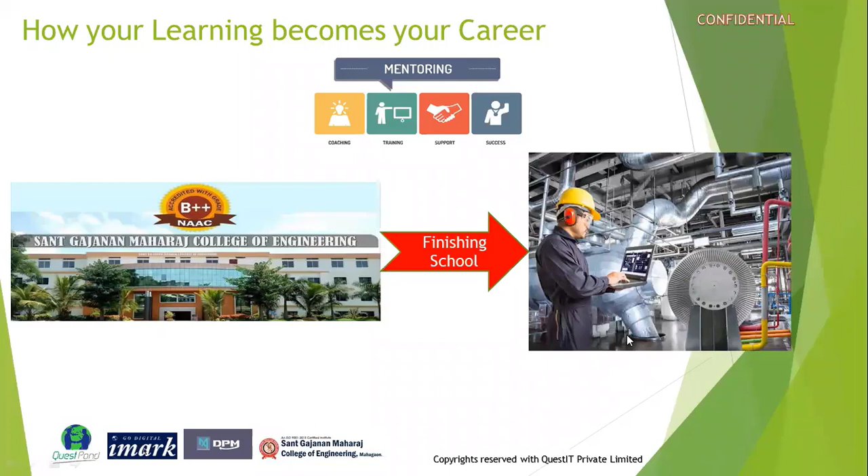As we always mention, our role is a role of a mentor to prepare students industry ready. So this is the 7th session. As I mentioned, there is a message. Before we start the session, I would like to cascade this message to everybody.

Let's look at this. There are 4 industrial revolutions that have taken place. Back in the 17th century, end of the 17th century, that was the first time when motors started coming. That was the pre-industry period. So the first time there was some activity where machines started converting to human advantage.

The machines were used to roll the wheels. That was the time when the concept of automobile started.

In 1870, again end of the 19th century, mass production started. Industries started building up, large industries started building up. That was the time when there was a movement across the world. Paper mills started, steel plants started. Whichever raw materials or minerals were freely available in nature, depending on those, a lot of industries started, and jute mills started coming up. So that was late 1800s. There was a big change that time.

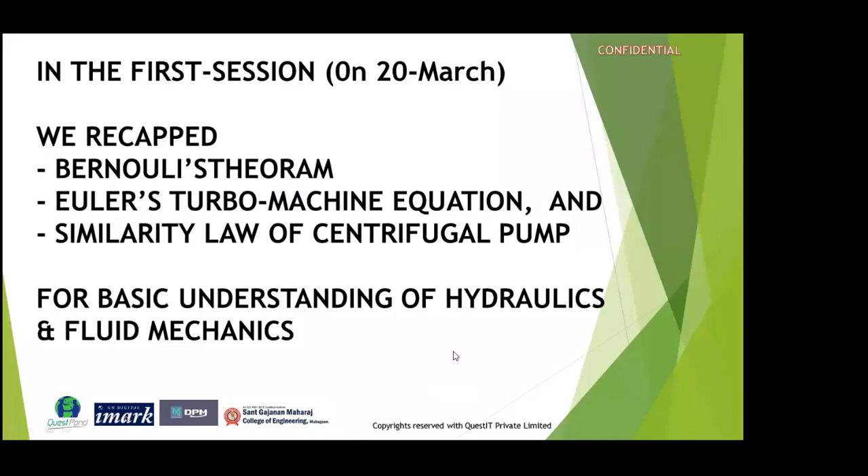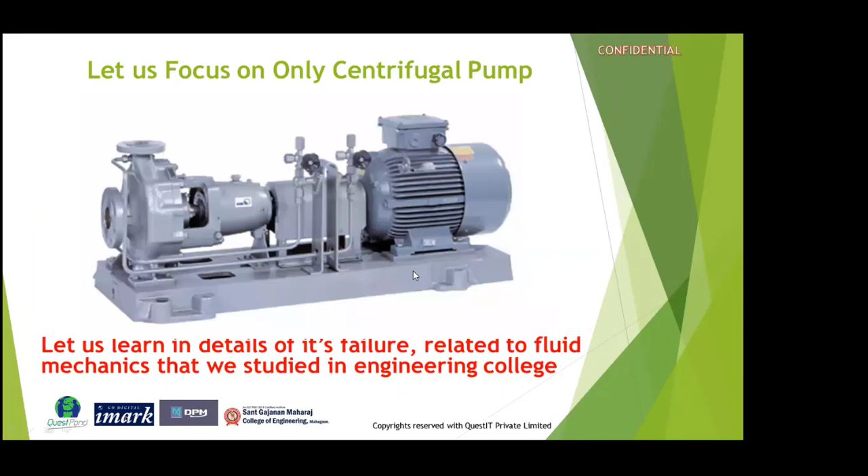So we have done certain clarification on the hydraulics, applied on centrifugal pump. These are the things we had gone through of centrifugal pump, the affinity laws. We focused on centrifugal pump, and talked about the graphical representation of its performance.

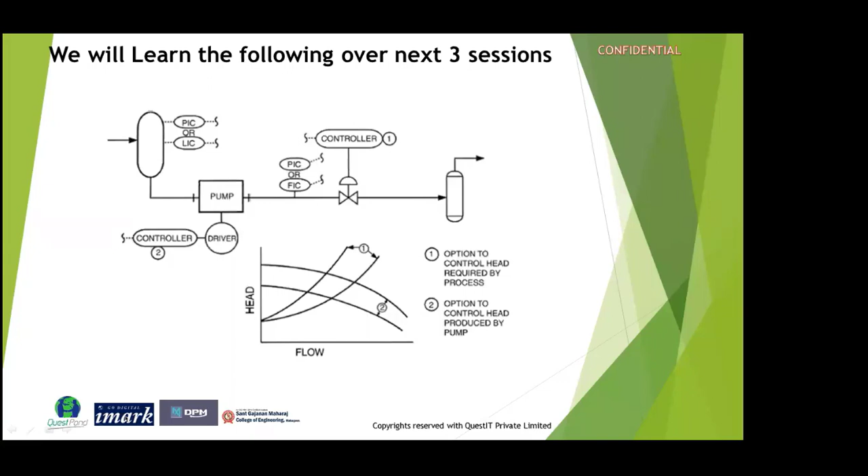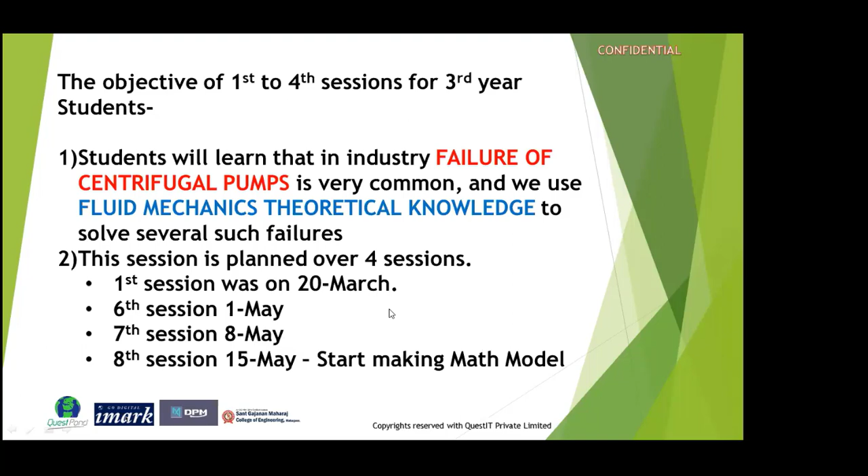Now let us look at where we are. We are on 7th session. Today I'm just giving some idea about the concept. Starting from next session, we'll start making the mathematical model, and then how it will be developed in the next sessions. The 9th and 10th session, these are very tentative - the mathematical model of centrifugal pump will hopefully be ready.

This will be done by you guys, and the one who had done the best, we will take that and move forward. Then what we will do is introduce you to another machine, a little more complicated machine, screw compressor. So far we were doing centrifugal pump, we will switch over from centrifugal pump to screw compressor. We want to expose you to a somewhat complicated machine, and then we'll show you how this model can be applied for this machine as well.

So then we will develop this model for screw compressor, and use this model and introduce it to the software of screw compressor. In the next 2 sessions, we will apply your model of screw compressor to the software. Then you will start doing hands-on on the software, working on it and doing experiments to understand what is the role, what is the meaning of this mathematical model, what is the meaning of all these theoretical things, why it is so important.

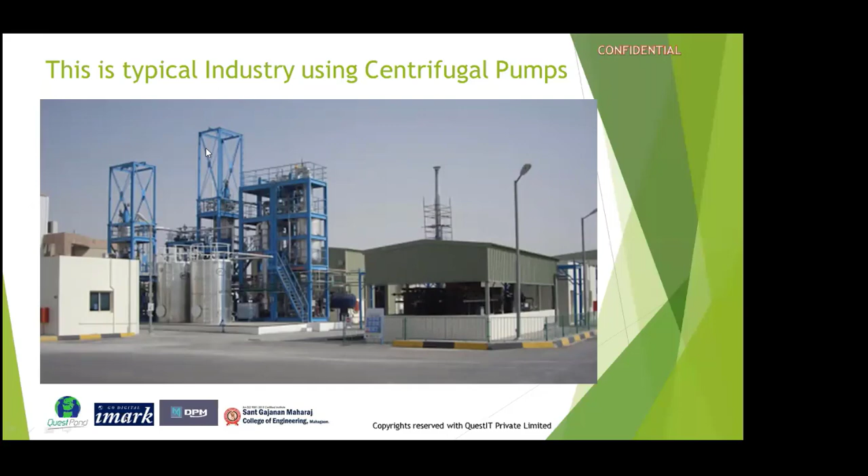Okay, so this is an industry where centrifugal pump is being used. We discussed all these internal components. These are the fluid dynamics you have done, and these are the curves we discussed that day, last session.

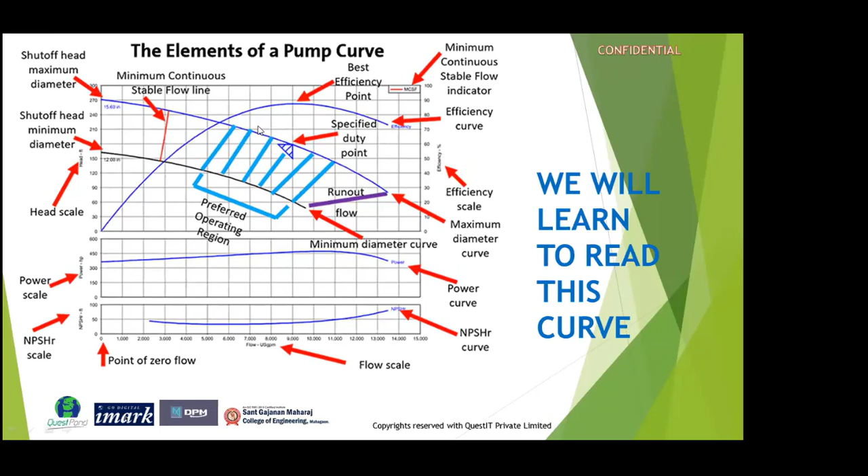We talked briefly about affinity law. So these are the different diameters of the impeller, and how, because of the affinity law, you do the calculation. There was a video also there.

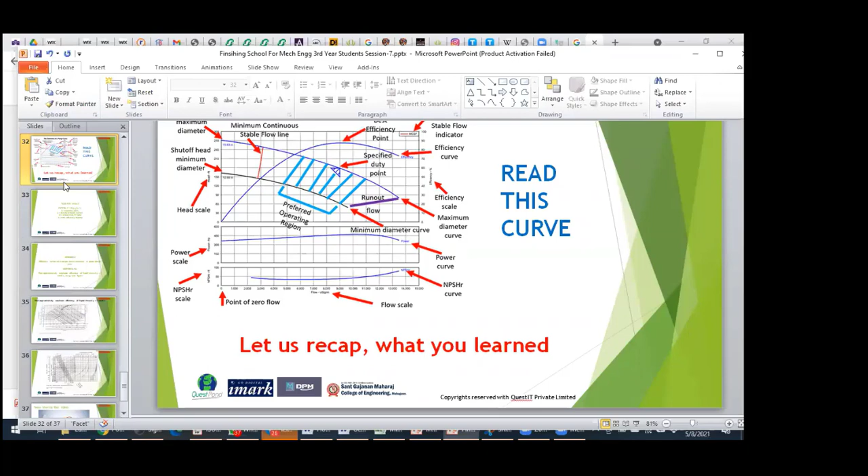Did you go through this video? Students, did you go through this video? Students, you can open your mic and talk.

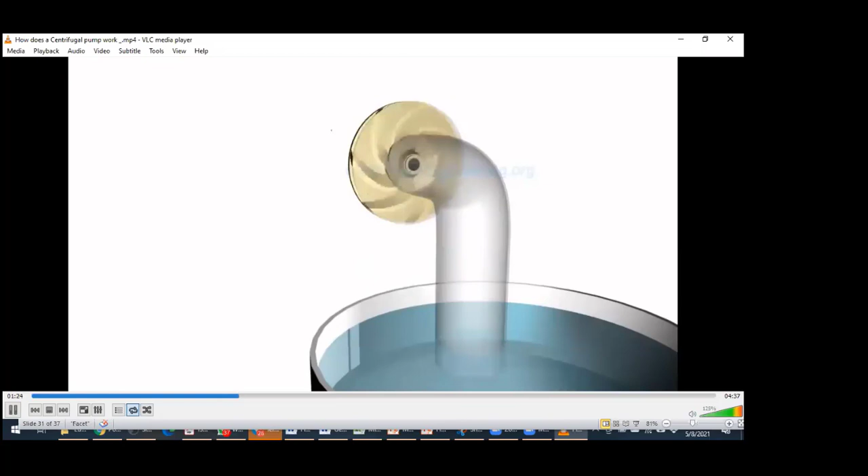Sir, this audio is not there, cannot hear. DD sir? Yes, please. Sir, this audio is not there, we cannot hear any audio. Is there any audio? Oh, there is no audio, we cannot hear the audio. Students, can you hear the audio? No, sir. Yeah, so please tell if you don't hear. Yeah, I think, sir, this audio will not work. So it's better that the students should go through this individually.

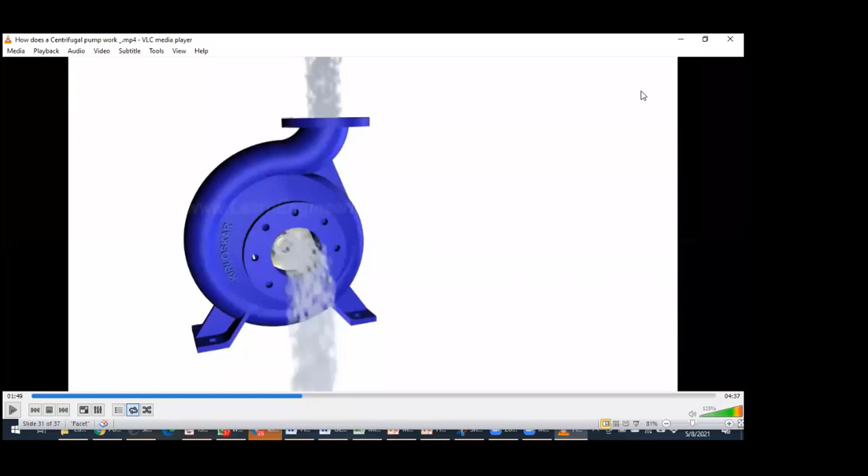Okay, fine. So students, you are requested to go through this video. It's a very informative video, produced by a company called Kirloskar. It's an Indian company, and this centrifugal pump is used very commonly in India and across the world. It's a very informative video, and it gives you basic concepts of the centrifugal pump. So I leave it here - I just wanted to demonstrate that there is a video there. Please go through it, it will give you some better concept. So I'll move on from here.

Now guys, last time I had given a task - have you understood it? Have you understood? Because it is important that if you don't understand, there is no point in me going for more complex calculations, developing mathematical model. Now you need to stop me and ask me that I don't understand this part.

Students, I need some response from you guys. Sir, will you explain that once again?

Yeah sure, I'm explaining it one more time. I'll explain as many times as you mention, but at least once you have to explain it back to me. Then only I will go to the next session. I'll just give you a feel of the next part, then come back here to explain what you asked again.

But then we have to start working on the calculation - power calculation, efficiency calculation. Now these are the curves, we have to understand them. What are these curves? For understanding this stage, and then only we will go to developing the mathematical model, it is important that we understand this curve again.

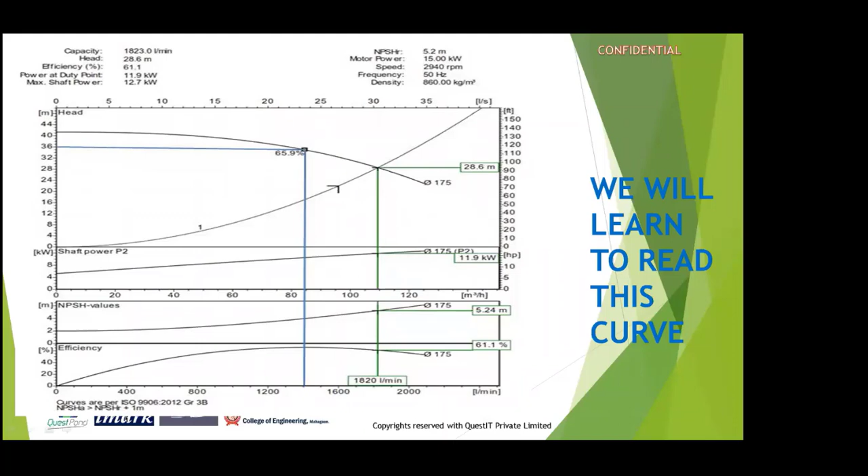I was trying to make you understand that it is important as an engineer to know the limit of a machine. If you run it there, you are fine. If you run less than that, it's also a problem. If you run more than that, that's also a problem. So it is important to recognize this - understanding it is very necessary. So you should experiment at different conditions using this formula and see if your figure matches the curve's figure or not.

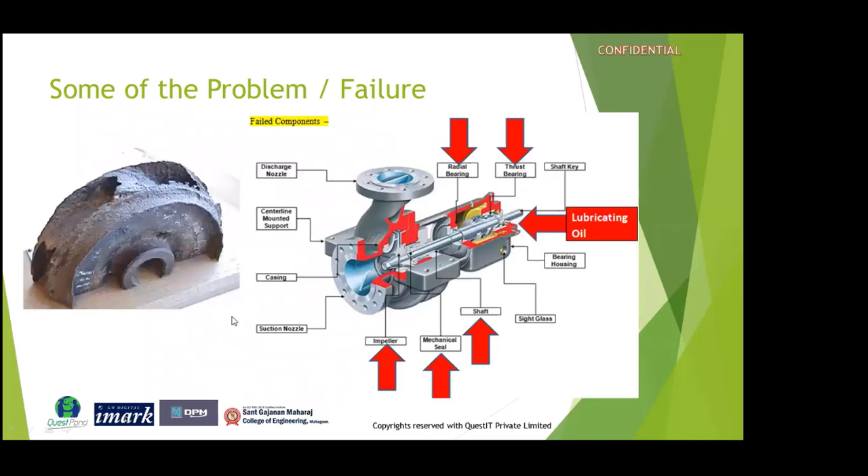This is the impeller. This impeller has a diameter - जैसे यहाँ से लेकर के यहाँ तक, this is diameter. This is called diameter.

Now, if you cut it, you can make it smaller impeller. The diameter will become smaller. So usually, जब impeller sell होता है, it is slightly bigger. And then depending on your requirement, you cut it to appropriate size. जो जरूरत होता है उसी size पे आप run करते हो.

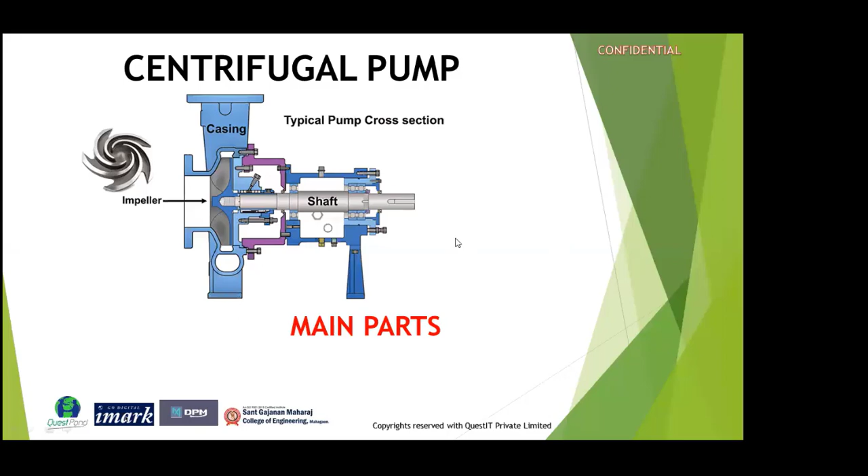तो कैसे decision होता है cut करने का? कट करने का डिसीजन होता है affinity laws. This is also one of the things in hydraulics you have studied.

Now, when you say D1 is the original diameter, D2 is the new diameter, if you change the diameter, the flow will change, head will change, power will change. This is speed - since you are not changing the speed, N2 and N1 is equal.

So only Q is changing proportional to diameter. Flow is changing proportional to diameter. छोटा कर दोगे तो flow कम हो जाएगा. Head is in square of diameter - तो diameter जितना change करोगे उसका square way में head change होगा. और power cube पे change होगा.

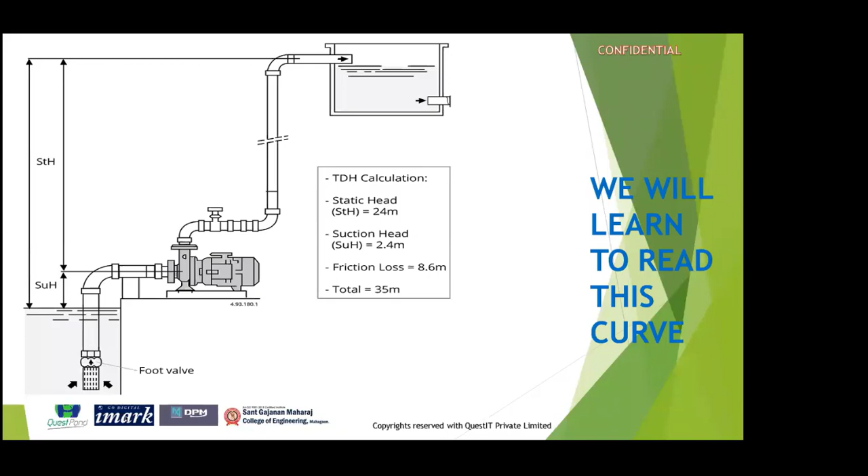जैसे मैंने बोला ना यहाँ पे कि the decision is taken that don't operate this pump at lower head. आप operate इस पे करो. आपका failure हो रहा है इसका मतलब आपका problem यहाँ पे. तो ये जो decisions हैं, these decisions depend on these equations. इसकी understanding graph का understanding पे depend करता है. This affinity law you are using it.

Okay. Now, read this curve. This curve is the same way as the other one. This is that head curve. This is the efficiency curve. This is a power curve. And this is the NPSH curve. We have not discussed it, we'll discuss later. Same thing we are talking.

ये जो blue lines हैं, these are the area where efficiency is maximum. This is the high efficiency zone. So preferably you should operate in this line, somewhere in this zone - this is called operating region, preferred operating region. This is the location where maximum efficiency is there. So this is the interpretation of the same thing what we talked about in a different way, all put together.

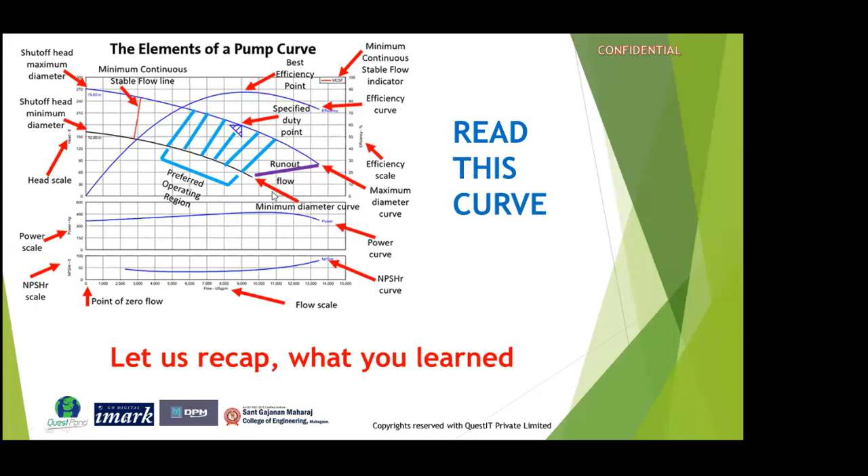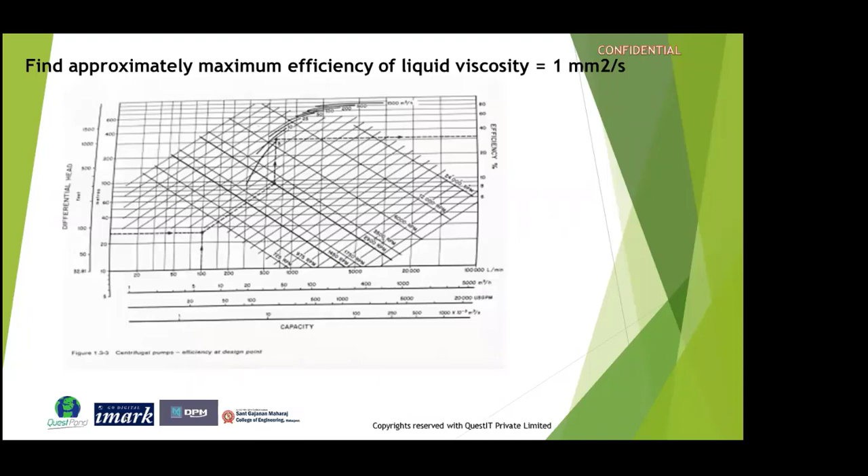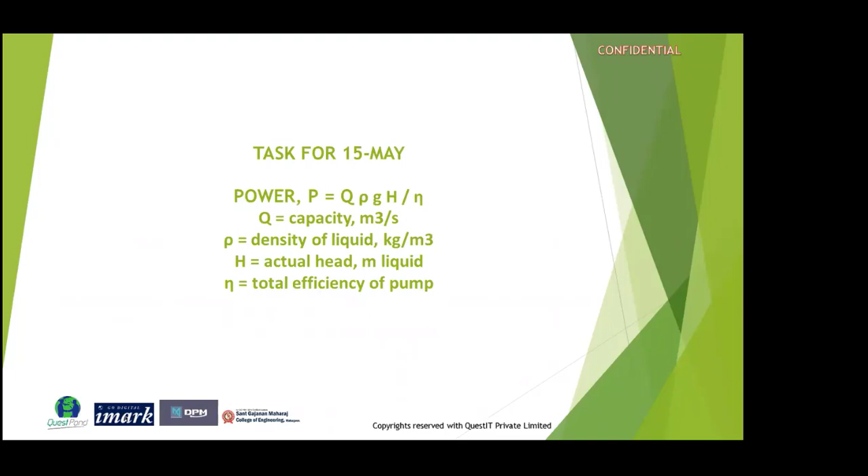This formula you can use it. There are certain more graphical formations are there, but since you are not clear, so अभी मत करो - ये जो दो ग्राफ मैंने दिया है, don't do now. We will understand it next time. Try this, experiment it, करके देखो आपका रीडिंग, आपका वैल्यू और ग्राफ का वैल्यू मैच कर रहा है या नहीं.

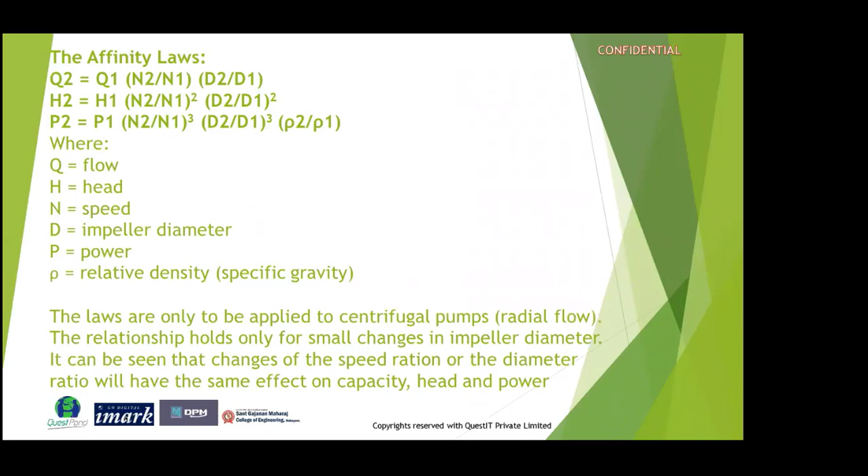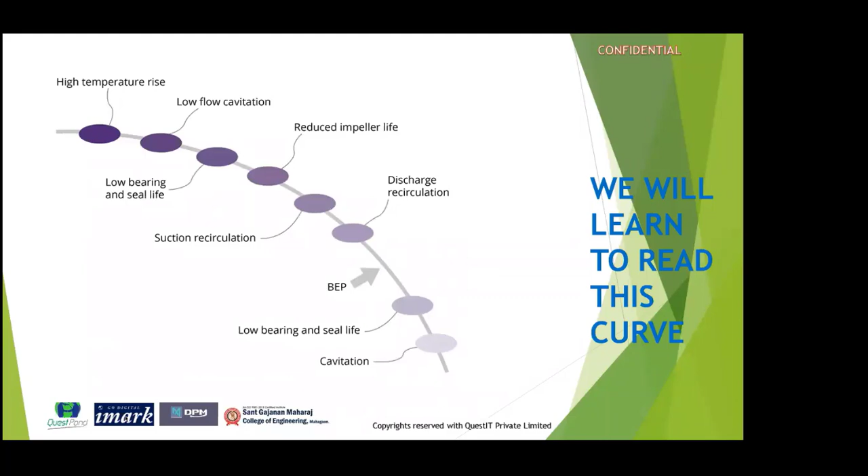ये जो वीडियो है, run it and see. Apply this formula at different impeller diameter, and see whether it is matching or not. Concept of BEP is important. ज़्यादा run करोगे तब भी problem है, कम करोगे तब भी problem है.

Is it a little more clear, dear? Yes, sir.

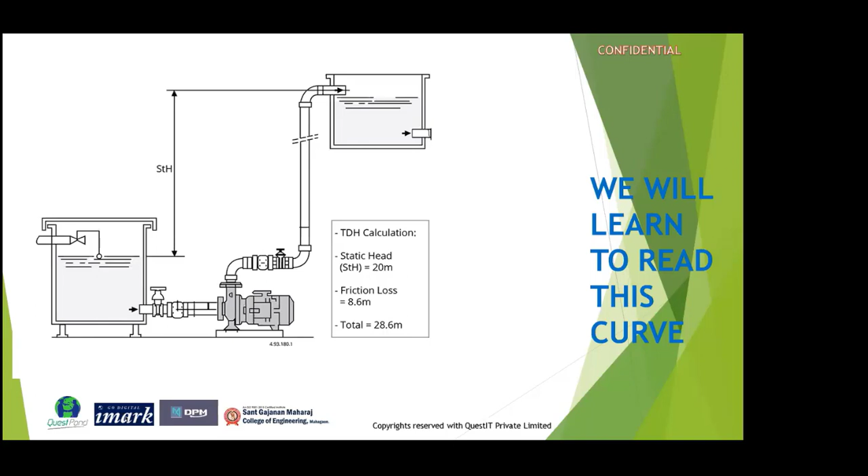Try yourself, because once we go to the next stage of modeling, we'll be using the same formula, but for some specific purpose, and then you will start having a feel of it कि अच्छा जो सॉफ्टवेयर वगैरह बनता है ऐसे ही बनता है. This is the way it is being made, and then you try it out, and the same concept हम एक दूसरे मशीन पे ट्राई करेंगे, स्क्रू कंप्रेसर पे, जो मोर कॉम्प्लिकेटेड मशीन है. So उसमें we will be introducing few more things - thermodynamics also we will be using it. So before going to that level, this is a very basic, simple thing. You need to understand what is the meaning of this graph.

Once you are comfortable, then next session onwards, we will move towards little complex. Okay?